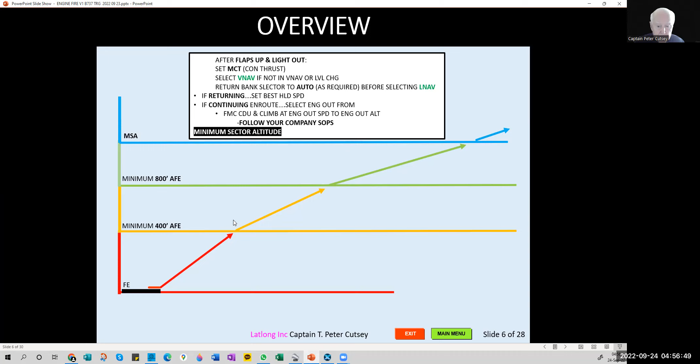I've got a little note down here that we're going to see later on. If you had a malfunction other than an engine fire, you would fly the airplane, use rudder to center the control wheel and track the center line and your speed V2 to V2 plus 20, and that should be commanded by the command bars once you've pitched up to 15 degrees, according to the FCTM.

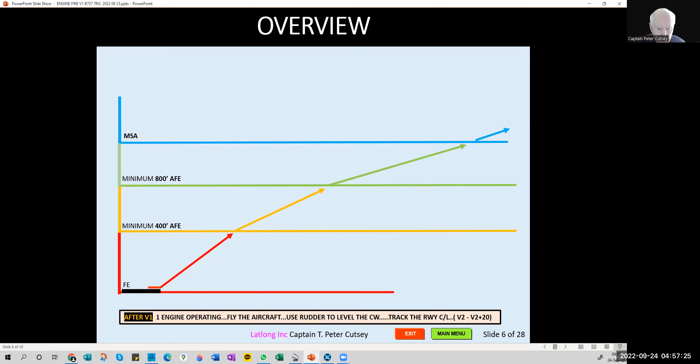All right, let's go back to the main menu. And now that we've looked at that, let's have a look at each segment one by one. The first segment that we were talking about was from liftoff to a minimum of 400 feet. Now, in this particular case, fly the airplane, yes. Cancel the fire bell or master caution as applicable. That will be the pilot monitoring's duty. So in this case, both the master warning and master caution should be canceled.

Now, the next item, the third and the fourth, would be for an engine inoperative. So make sure that in today's case, it's a normal rotation to 15 degrees, then follow the command bars after. All right, so follow the command bars. Remember, we're 2 engines today for this particular point. Track the extended center line of the runway. You can do that in heading select and use rudder trim when under control. Well, that would be if you had an engine out. And then engage the autopilot when trimmed and comfortable.

I say that, minimum of 400 feet, of course, but I say that because it's most important that you fly the airplane and you have full control of the airplane before you engage the autopilot. If the aircraft is not in trim, an autopilot won't be engaged. So if you rush the process, you'll end up probably not flying the airplane properly. So a big consideration. So remember that what we're looking at here applies to an engine inoperative.

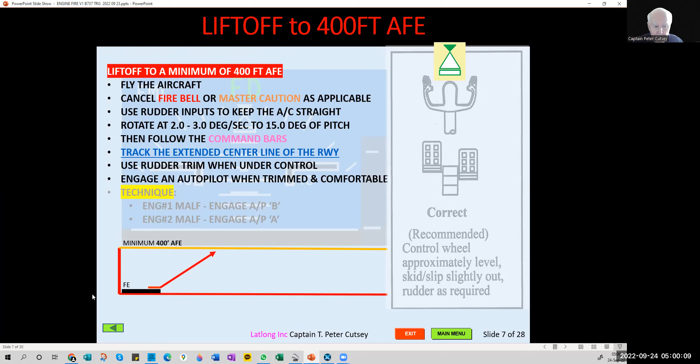All right. From 800 feet above field elevation to MSA, fly the aircraft and track the extended center line. Now, at this point, you're going to be on a single engine because you will have done the memory items that we'll cover later in a PowerPoint. So at this point, you are flying with an engine out. So track the extended center line of the runway, and we'll show you a little picture on how to do that later. Ensure VNAV path annunciated on the PFD and speed bug moved to flaps up speed.

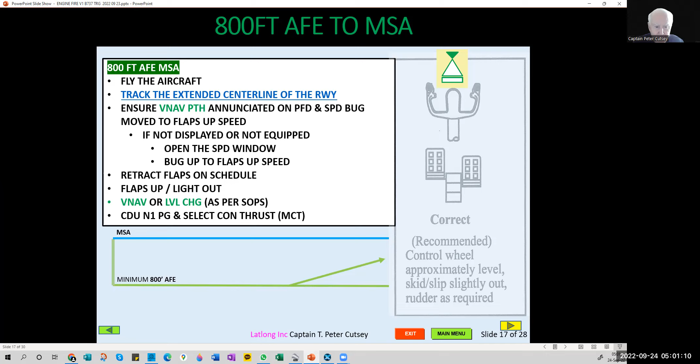If it doesn't happen, you're going to have to open the speed window and bug up and then clean up. You retract flaps on schedule, flaps up, lights out, VNAV or level change as per your company SOPs, and CDU N1 page, and select CON thrust, MCT. All right, so that is what we do from 800 feet to MSA, and then from MSA and above, which is the blue zone, we're going to navigate.

You may have to turn before that. In today's case, that will be the case, but this is just something general. Providing you're at MSA and above, you're not restricted in most cases to any bank limit. So communicate your intentions, ensure the bank limit is returned to auto, as I mentioned before.

If returning, ideally hold over the departure airport. We're going to be doing that today. And set up the holding and a quick review to ensure recall items are completed. Now, as you are aviating, and we're going to be in a left turn after takeoff using, I believe it's 20 degrees of bank, we'll check it later, and turning left all the way around back to the VOR, which is very close to the extended center line of runway 1.

Maybe somebody should mention, have we completed memory items? Yes, we have. All right, fine and dandy. Just make sure, because things get pretty busy and it's easy to forget if there are memory items involved. So then enter the hold and then complete the first non-normal checklist, which is the checklist engine fire or engine severe damage or separation. And that's how you call for it.

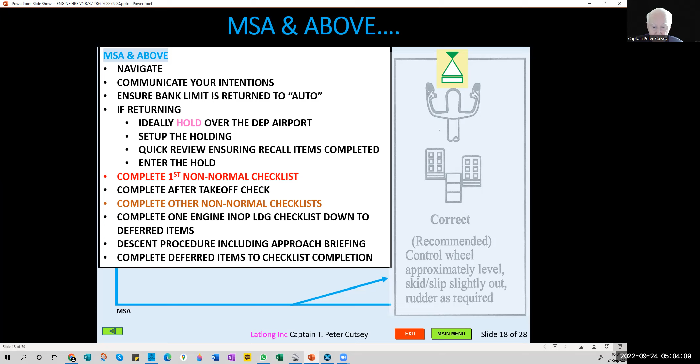But if you're coming back and landing, which will be the case today, we will do the one engine inoperative landing checklist as the last checklist, down to deferred items. And then we'll get the airplane ready and the approach set up. And then we'll continue with the checklist, which will cover the descent and approach checklists. And that's all included in the one engine inoperative landing checklist. So that's what we've mentioned here. All right, so that is important. So let's just have a quick look at PowerPoint.

Remember that pilot flying, fly the airplane, rotate normally because you're on two engines, 2 to 3 degrees per second towards 15 degrees of pitch, and follow the command bars. The pilot monitoring, in this case the first officer, cancel the fire bell, and of course master caution, if it is illuminated, which it probably will be, cancel it also, in order to allow it to pick up another problem.

Now, verify a positive rate of climb on the barometric altimeter and call positive rate. The barometric altimeter will be the last one to move. Don't use the radio altimeter and don't use vertical speed. Make sure you get your barometric altimeter moving. Then call positive rate. And the pilot flying, after checking the positive rate on the barometric altimeter, will call gear up. Pilot monitoring, place the landing gear lever to the up position, and when the gear lights are extinguished, place the landing gear lever to the off position. That's on the NG. On the MAX, the landing gear lever will remain in the up position.

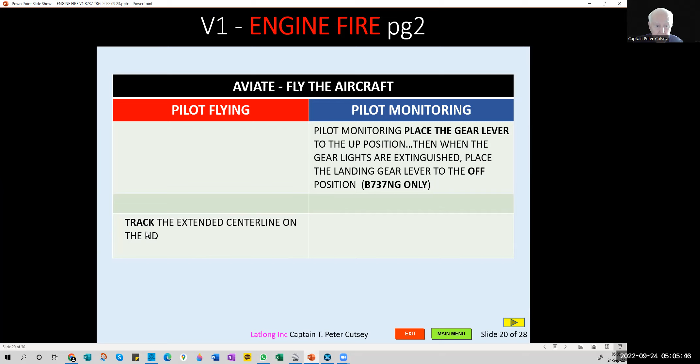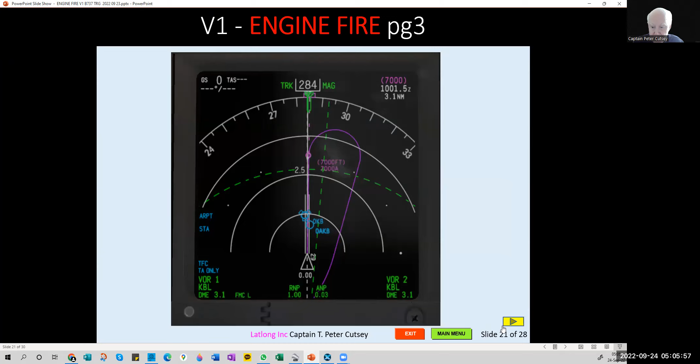Track the extended center line on the nav display. Here's just a quick look at what our nav display will look like today. So track the extended center line. And this is the engine out procedure: at 5.8 DME of the Kabul VOR, which is very close to the airport, you're going to start a left turn at 20 degrees of bank back to the VOR, then hold inbound 110 degrees, right-hand turn. All right.

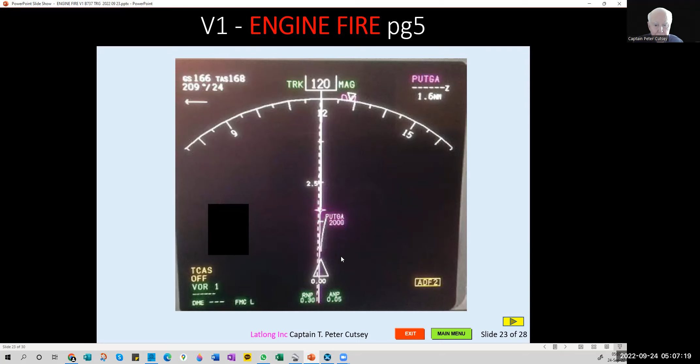If you put the tip of the 30-second trend vector on the white dotted line, you will return to the actual track. In this case, for this airport, it was a track of 120 degrees or 119. And that's how you track the center line using your nav display. This tool is super duper for tracking the center line. You don't have to even think about the wind as long as you use that trend vector. All right, so that's good.

At 400 feet, call heading select and ensure VNAV is engaged if equipped. And if required, set the bank limit, in our case today 15 degrees, and open the speed window and identify. The pilot monitoring will select heading select unless we're already there, ensure VNAV is engaged if equipped, and if requested, select the bank limit, which today will be 15 degrees, and open the speed window. Identify the malfunction and call engine fire number 1.

Now, pilot monitoring also makes sure that you select recall at 400 feet. That'll bring the master caution light back, which has been triggered by the overheat light. So that's important, and that's not done till 400 feet.

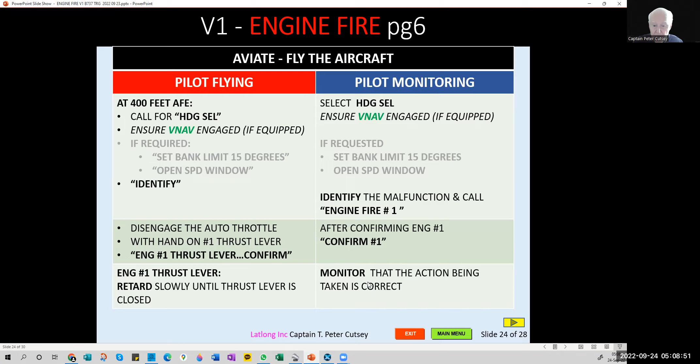Disengage the autothrottle, and with the hand on the number 1 thrust lever, the pilot flying, in this case the captain, will say engine number 1 thrust lever, confirm. The pilot monitoring will make sure by confirming engine number one, and will say confirm number one, and the pilot flying will retard the number one thrust lever until the lever is closed. And the pilot monitoring, first officer in this case, will make sure that he does that. All right, that's important.

Then the pilot monitoring places his or her hand on the number one engine start lever and says, engine number one start lever. The pilot flying confirms the selection is correct and says, confirm number one. Pilot monitoring selects the respective start lever to cutoff, saying cutoff. Your company SOPs may want you to say something different, but this is standard that most airlines use, and this is what Boeing recommends. Pilot monitoring places his or her hand on the number one engine fire switch and says, engine number one fire switch. Pilot flying confirms and says, confirm number one.

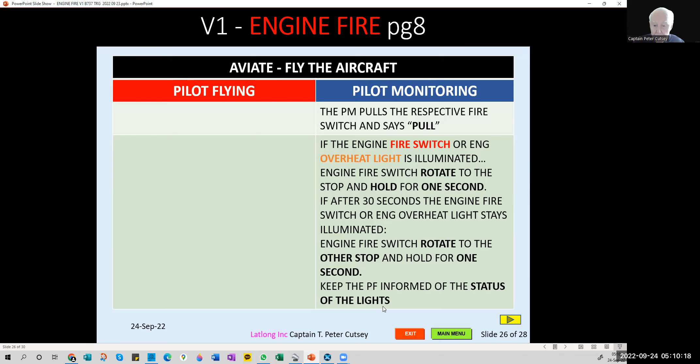A little note I put here: ensure to place the hand under the fire switch in order to allow the pilot flying to view the switch before pulling. All right. Pilot monitoring pulls the respective fire switch and says pull. If the engine fire switch lights, or, very important, the overheat light is illuminated, engine fire switch rotate to the stop, hold for 1 second. If after 30 seconds the engine fire switch or overheat light stays illuminated, engine fire switch rotate to the other stop and hold for 1 second. Keep the pilot flying informed of the status of the lights.

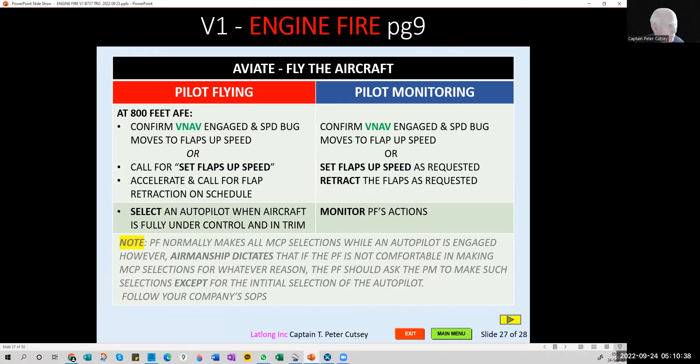So that's important. And if the engine fire warning switch, or the overheat light, is illuminated, the 'or' is important because you may not have these lights on, but you may have the engine overheat light, then you rotate and hold for 1 second. All right. And if after 30 seconds the engine fire switch or engine overheat light stays illuminated, then rotate to the other stop and hold for 1 second. Okay. Continue to monitor the status of the engine fire. So this is just a review.

This will be the end of this video, which is part one. In part two, we'll get into a few more items, and then we'll go on to flying the airplane and experience an engine out.